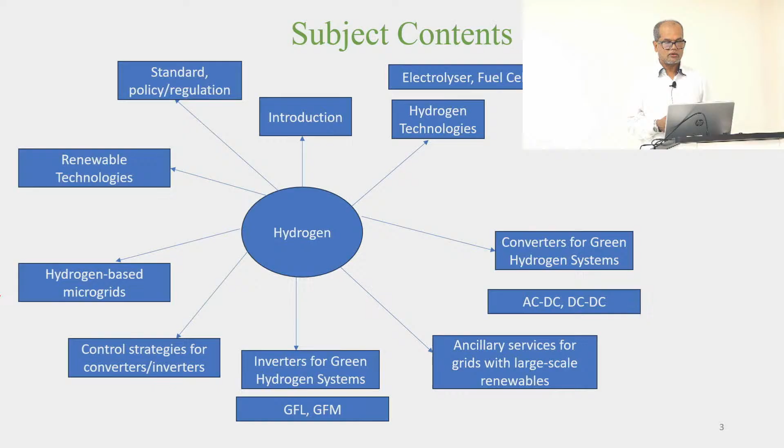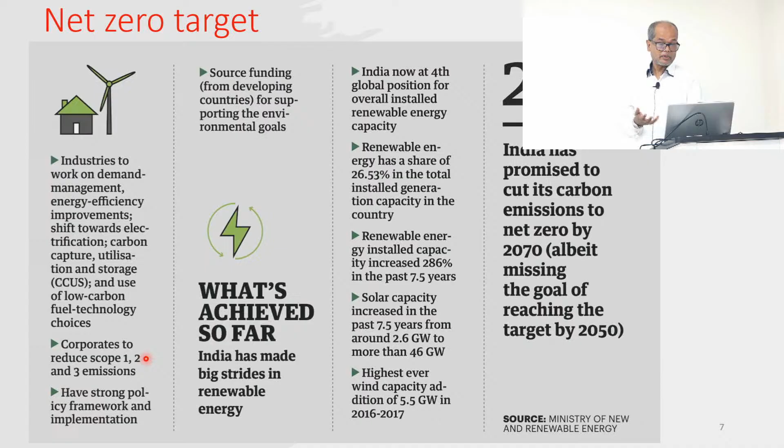Now, although different sectors contribute to greenhouse gas emissions, as you know, the electrical power network is one of the major contributors of carbon dioxide or greenhouse gas emissions. And it's not like we can address all of the challenges only by going for 100% generation from renewables. Due to the energy transition, across the different sectors in the power system, including generation, transmission, distribution and even behind the meter, there are many things happening.

For example, if you think about generation, as you know, most existing centralized fossil fuel generators are being replaced with renewable sources. The transmission sector, although comparatively more intelligent than distribution, is also seeing several changes. For example, in recent years you will see many phasor measurement units for wide area monitoring as well as control. In Australia, we do have a number of phasor measurement units installed in the transmission sector.

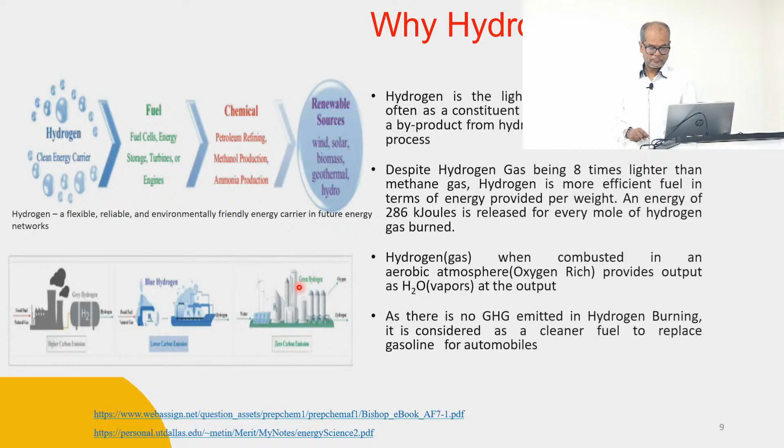This one shows the total value chain of the green hydrogen system. It involves production, and there are many production methods; we're going to touch most of them, like gasification, electrolysis, and steam methane reforming. We won't focus much on carbon capture, but with blue and other hydrogen systems we do use carbon capture, because that type of hydrogen emits carbon. We'll also talk a little about combining gas and electricity networks, and there is research going on into improving the combined network.

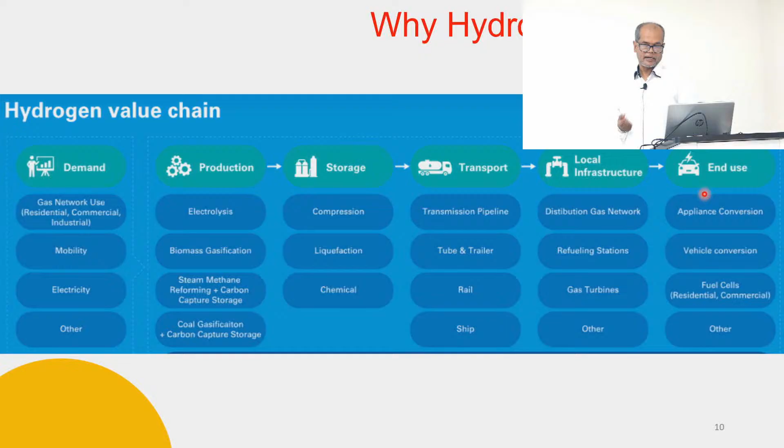So what I'm trying to say is that the gas network, electricity network, and also hydrogen are all interconnected. Now at some stage, we can optimize and improve the performance of individual systems, but to get the better benefit, sometimes we might need a combined model for the whole system, to optimize and also benefit from the coupled system.

Although it's not always that you have to consider the combined model. For certain applications, you can just consider either a device or part of the whole system. But as I said, if you want the whole value chain, then sometimes you need to develop the model for the interconnected system as well.

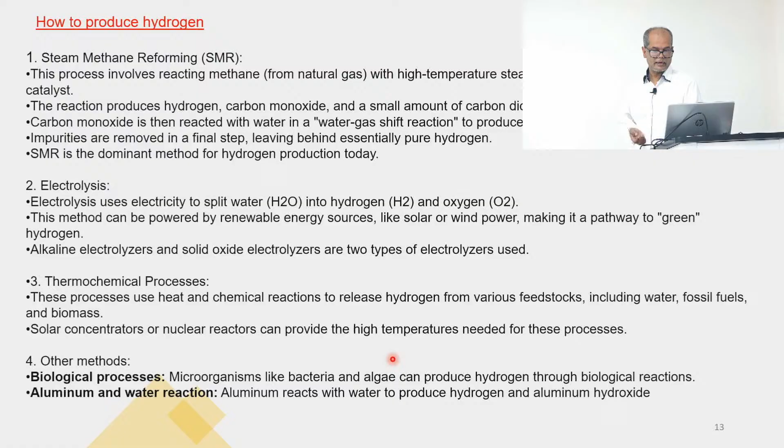You might also know that solar concentrators, even nuclear reactors, can provide the very high temperature needed for the process to produce hydrogen. And there are other biological methods that use bacteria and algae to produce hydrogen from biological reactions as well.

So there are different pathways, but in this course we're going to focus more on electricity using the electrolysis process. Although it might be difficult to read, it's giving some comparison of different methods. The most important parameters could be the efficiency we get from different methods, and also cost, considering the base cost, the current one being steam methane reforming. So compared to this one, how is the cost for other methods, and which technologies are already matured and which are still going through more research and development to improve efficiency, safety, and so on.

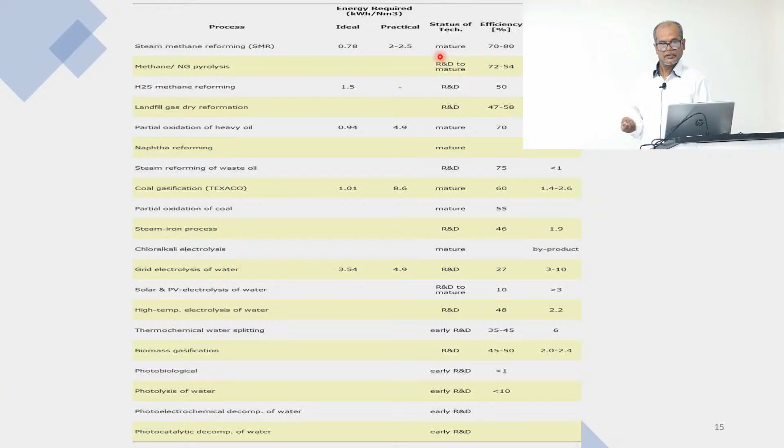So now I'm going to go quickly into more details about the different methods we can use for hydrogen production. Steam reformation, I already mentioned, is one of the most matured and commercially established processes. Different industries are already using it to produce ammonia, to refine petroleum, and in some cases for hydrogen energy systems as well. Among the existing commercially available methods, it's one of the cheapest.

And we're going to talk about how there are mainly three components: anode, cathode, and electrolyte. There are chemical reactions happening at both anode and cathode, and here you can see that from methane gas using water, it produces hydrogen, but it also produces some carbon monoxide. Using that carbon monoxide again with water can help produce more hydrogen. But you can see it still emits some carbon dioxide, and that's why we need carbon capture if we want to make this hydrogen cleaner.

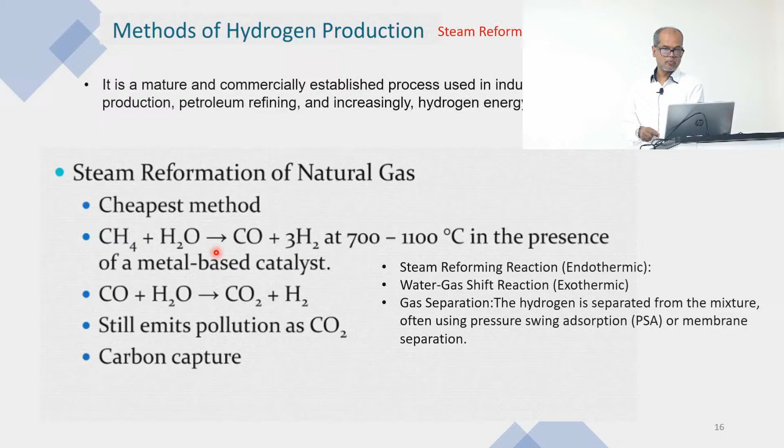It has some advantages. As I mentioned, it's more matured, relatively low production cost, comparatively higher efficiency, but it has limitations in terms of carbon dioxide emission. It relies on fossil fuel, mainly natural gas, and it needs higher energy input, because the process is highly endothermic. There are a number of applications: ammonia, petroleum refining, methanol production. It can be used for fuel cells if coupled with carbon capture and storage, and it can be used as blue hydrogen when integrated with carbon capture and storage technology.

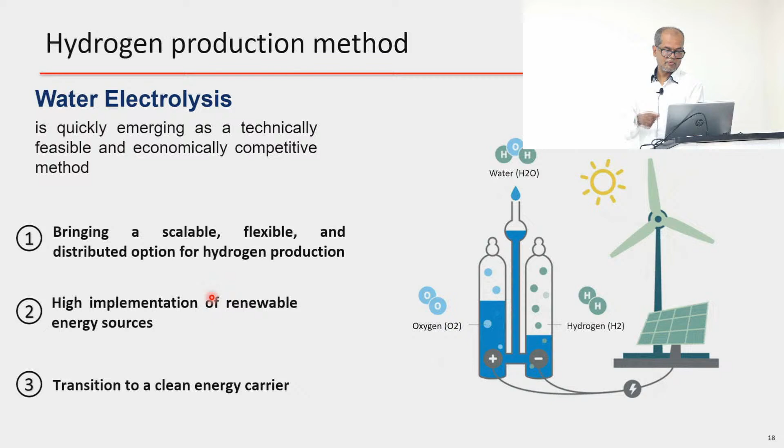And this is, as I said, our most optimal and desired process in coming years to produce hydrogen from different renewable energy sources. The energy might come from solar and wind, and using the electrolysis process we can produce hydrogen, but it also produces some oxygen as a byproduct. This one is more scalable, flexible, and could be distributed for hydrogen production in any area you want. And as we've talked many times, it uses energy from renewable sources.

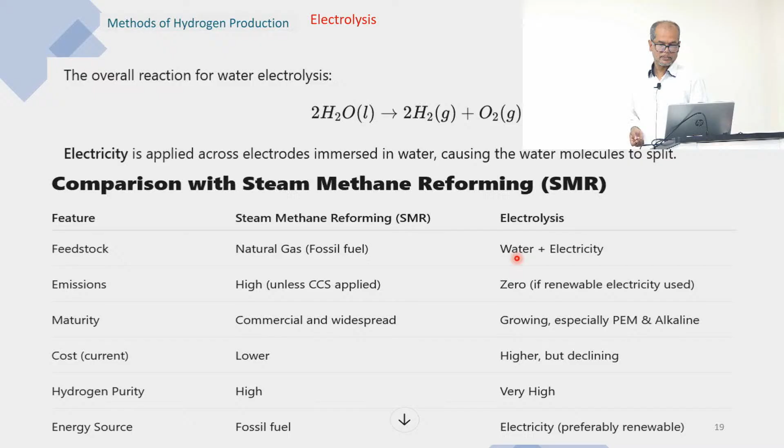So if you compare electrolysis and steam methane reforming, cost is one of the factors: steam methane reforming is relatively cheaper than electrolysis and more matured, but it definitely has higher emissions, while for electrolysis it's almost zero when the input energy comes from renewable sources. Electrolysis uses mainly water and electricity, and the other uses fossil fuel like natural gas. We already talked about the advantages, so I'm not going to repeat that.

Still, if you think about the cost of producing hydrogen by electrolysis, in Australia it's still like $5 to $8 per kg, but to make it comparable with other gases it has to be around $2. So there are many research projects going on into how we can reduce the price by reducing the cost of hydrogen technology, reducing the price of input electricity, and improving the energy efficiency of the whole system. And so far production is only at a very micro scale, so macro-level production will also help reduce the price.

Hopefully that might happen in the next 5 to 10 years, and if it happens, green technology is going to be used for different industries like ammonia, methanol, steel, cement, even for transportation applications, energy storage, and more importantly, it's going to be connected at large scale with the grid to provide support, to reduce peak demand, to improve power quality, and to provide ancillary services like controlling voltage, frequency, and so on.

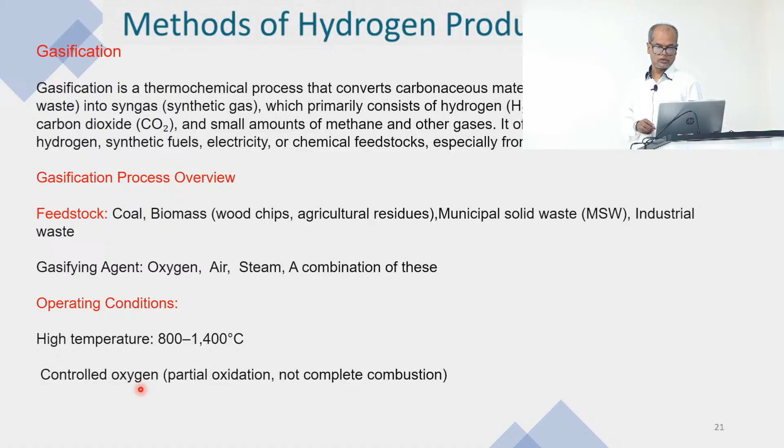Again, this one also has different types of applications: to produce hydrogen, synthetic fuels, ammonia, methanol, and waste-to-energy production. And it does actually convert low-value and waste material into usable energy. So that's one of the important advantages of this method. It has higher efficiency compared with direct combustion, but it does have a number of limitations as well, because it involves capital-intensive technology.

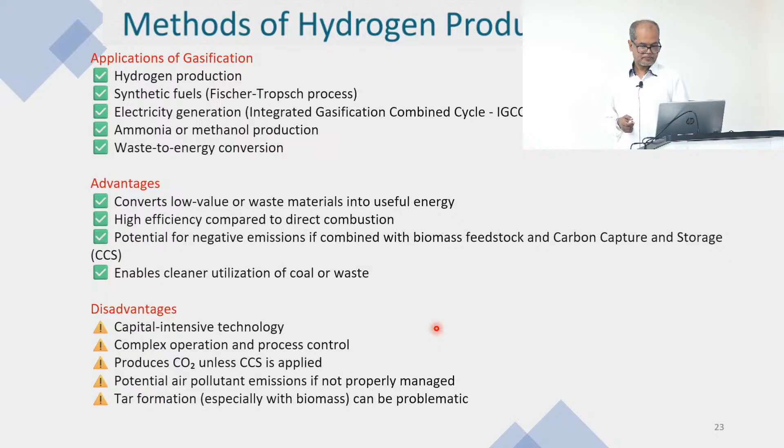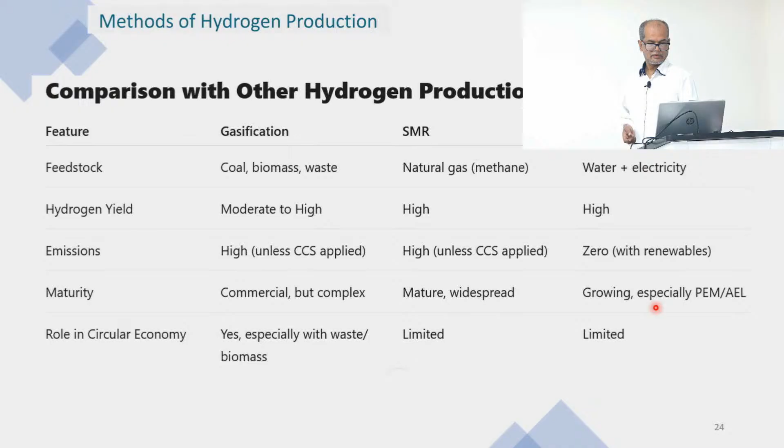It produces carbon dioxide unless we use carbon capture and storage technology. In terms of the overall process, it is the most complex, and we need to have good control of the overall process. And this is giving again a comparison among the 3 methods, but I think we already talked about most of this. In this case both are quite mature and commercially available, although this one is commercially available but still growing. So maybe we still need further improvement of the fuel cells as well as the electrolyzer technology that's currently available.

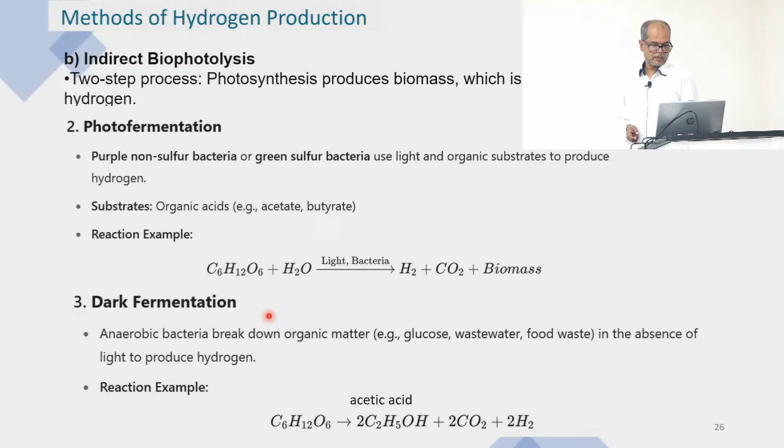So there are some indirect biological methods as well that have two steps, that can produce hydrogen from biomass using photosynthetic methods. So you can see that from glucose and water, using light and bacteria, it can actually produce hydrogen, although it does have some carbon as well. And also dark fermentation, that's another method that could be utilized to produce hydrogen from glucose as well.

We already talked many times about what green hydrogen is, what the different applications are, and why we call it green. You already know about that as well. We already talked about how it has an anode, cathode, and the electrolyte membrane, and the input energy coming from renewable energy sources. From water and input energy, it produces oxygen and hydrogen ions, and these hydrogen ions pass through the membrane to the cathode, and then using those hydrogen ions, it produces the final hydrogen.

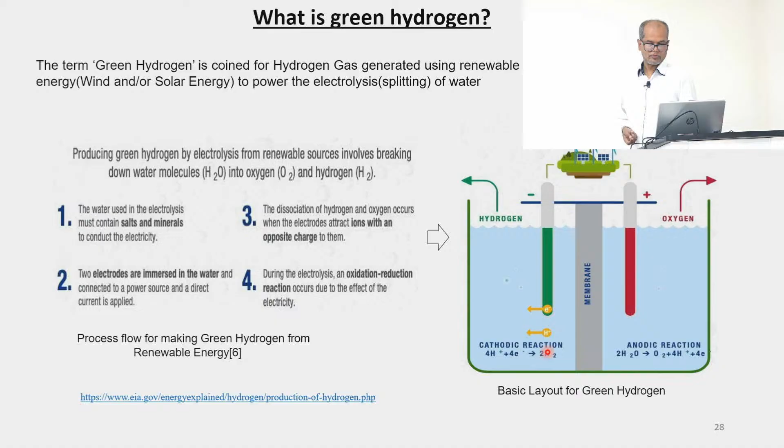I'll also skip this slide because you already have it, you can just read it later. We also already talked about the impact of different green hydrogen technologies on different sectors. For example, in the environment, it helps to reduce greenhouse gas emissions. It can improve air quality, and it can also provide a solution to a number of the problems introduced by large-scale renewable energy integration. For example, in Sydney and in different states, during off-peak time, in the morning and afternoon, we have additional renewable energy generation.

And in many cases, for example, if you have rooftop PV and you are producing energy, and you supply energy to the grid during off-peak time, instead of the grid providing money, they actually charge you, because they already have enough generation compared to the load demand, and when we supply additional energy to the grid, it creates more problems for the grid: power quality, voltage and frequency issues. So that's why they actually have a negative tariff.

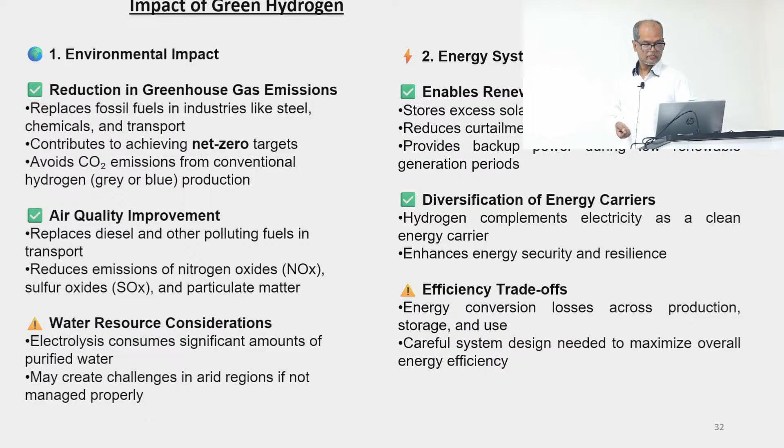Now, in Australia we already have a number of projects, some of them ongoing, but some of them are already producing green hydrogen as well.

One of the biggest projects happening now is in Queensland, in Brisbane, where the government is spending almost $15 billion. They have a big suburb with a number of different industries, commercial and residential areas, and the whole area is going to supply heating, cooling, industry, and different transportation applications.

We're gonna use hydrogen from that particular area. Not only that, we also have a number of renewable energy hubs and renewable energy zones where we have the option of including hydrogen. And in New South Wales, the government is now targeting a number of offshore areas - there are 5 areas already targeted, and work has already been done to have 5 hydrogen hubs, where they are also installing offshore wind.

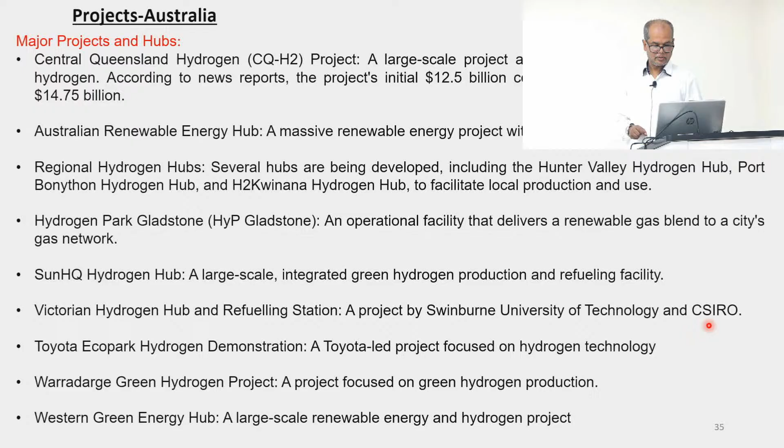In terms of transportation application, in Australia we already have 12 hydrogen refueling stations, out of which almost 6 are already operational, because in Australia we do have a number of hydrogen-powered small cars, but that number is not that high. But in terms of heavy vehicles like buses and trucks, there are actually a number of them in different states already running, and they can easily get hydrogen fuel from those fuel stations.

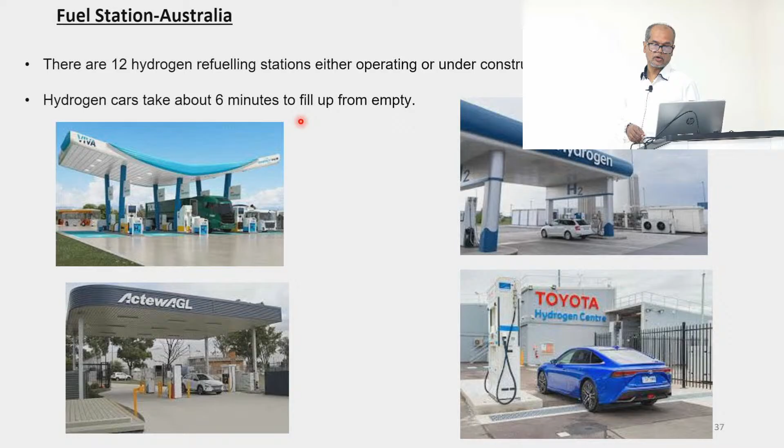As you know, if those vehicles use battery, mainly for heavy vehicles, they need a very long time to recharge the battery. Another option is to have a number of batteries, which makes the overall system bulky as well. So for those reasons, for heavy vehicles, hydrogen would be the best solution. But having said that, there are still some hydrogen cars available in Australia, and as I said, most states already have hydrogen fuel stations that are operational.

In India also, there are a number of projects ongoing. I know that India and the Australian government have had a number of discussions and talks to work together in this sector, because we also have potential that maybe these countries can export, not just utilize, but also export hydrogen to other countries as well.

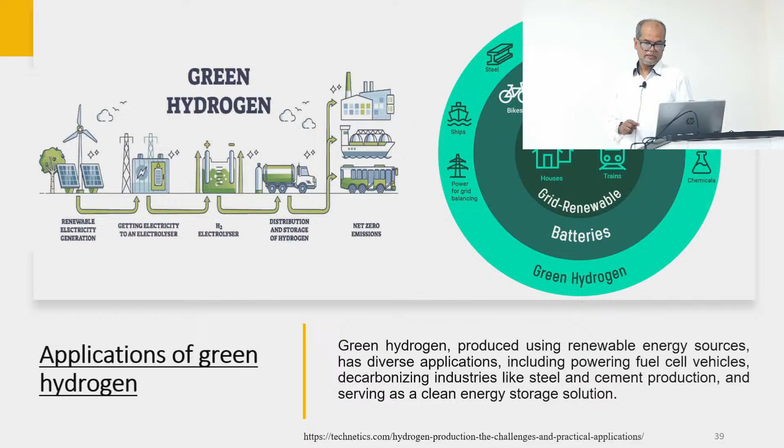I already mentioned different applications - battery already has different applications, but green hydrogen will have even bigger applications in grid, even in ships, steel industry, and even aviation - there are already a number of unmanned aerial vehicles using hydrogen. Also, different fertilizer industries and other chemical industries might be using hydrogen in coming years.

As I already mentioned, fuel cell application in heavy duty vehicles and long haul transportation - this technology is already available. Only the issue is the price.

But as you know, both the battery and hydrogen price are coming down significantly. Every year, the battery price is going down by 15%. So almost in 3 years, the battery price has gone down like 50%. And if that trend continues, I believe in the next 5 years, the price for IC engine based cars and battery vehicle cars would be almost quite similar.

Although hydrogen might take a little bit longer, maybe 5 to 10 years, to bring the price down. But the way that both research and development are going, and most governments are spending heavily in this sector, we are quite hopeful that this time hydrogen is definitely going to be one of the dominant fuels in coming years.

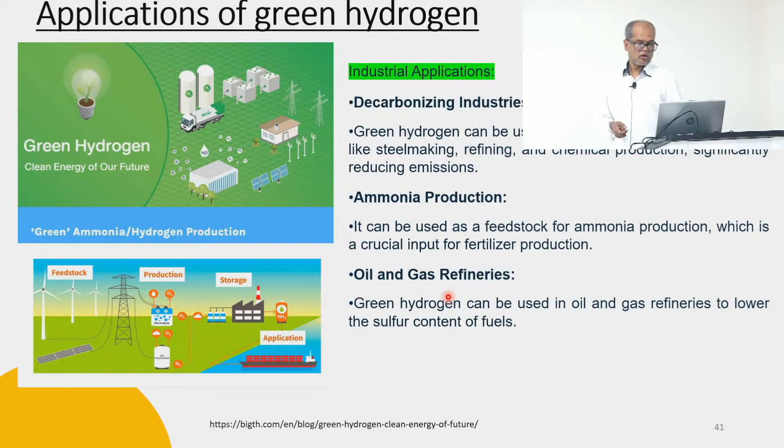So it's not only transportation but also decarbonizing different sectors, because in many cases you will see that some industries might not be directly electrified. So in those cases, to decarbonize, hydrogen could be one good alternative potential. It also can be used, as I mentioned, in the oil and gas refinery sector as well.

In different chemical production, and also steel, cement production, methanol production - in those industries too. In Australia, already one of the steel and cement production companies is using green hydrogen to decarbonize the sector, because in Australia, what happens is in any industry, if they produce carbon dioxide beyond a certain level, there is a penalty.

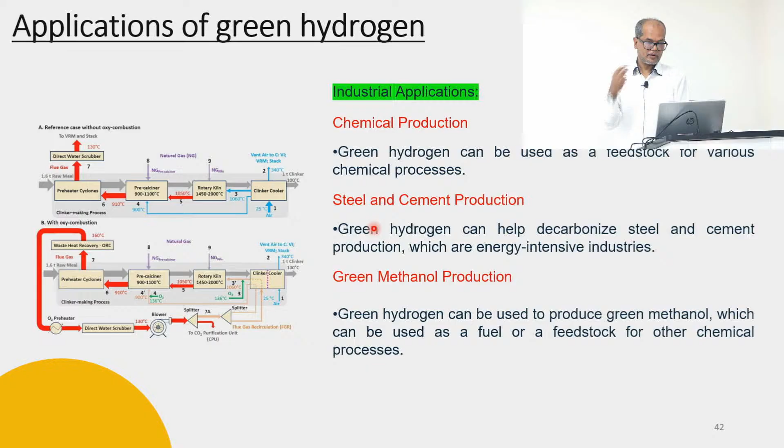So that's why most industries are also trying to have different alternative options to reduce their greenhouse gas emissions, and that's why they have already started to use green and blue hydrogen using CCS, to meet their target. And in the energy sector, as I said...

Still there isn't any large scale integration happening, but if you want to have 80%, 90% renewables, then definitely we have to think beyond only battery, because the battery has got capacity for only maybe a few hours. But if you want to have very longer duration storage, then definitely hydrogen is going to be the better solution.

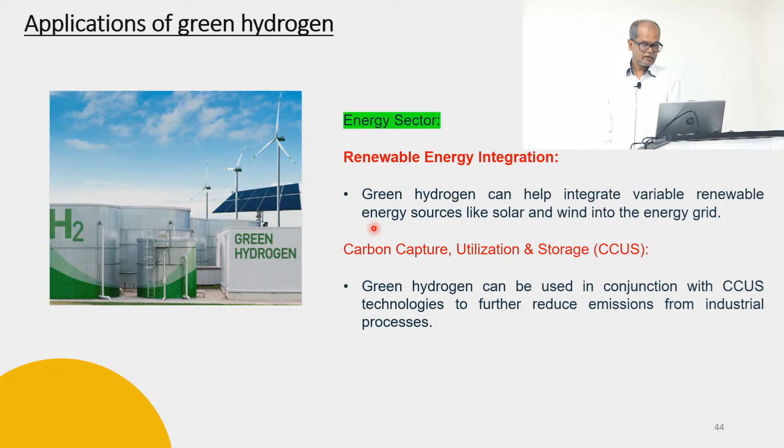So definitely the energy sector is going to use hydrogen to solve many of the problems that we're going to discuss in coming lectures.

In heating, already in some areas in Australia, they are using green hydrogen for heating applications. In food, many food industries are also in the process of thinking about utilizing hydrogen for their food production as well.

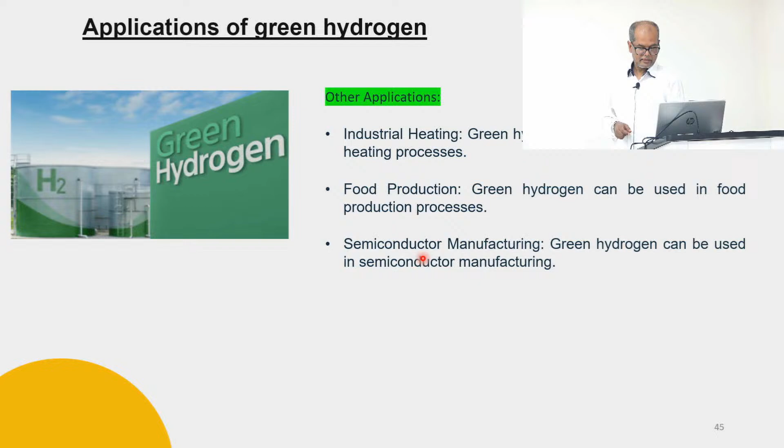Many semiconductor manufacturing industries are also thinking to utilize hydrogen in coming years. And as I mentioned, different countries have got different forecasting about their upcoming hydrogen consumption as well as hydrogen export.

So in Australia, we have got different scenarios considering business as usual, or a step change, or gradual change. But whatever way, definitely the consumption of hydrogen is going to significantly increase in Australia.

But in Australia, actually the main idea is not only national consumption, but also to export hydrogen to countries like Japan, Germany, Korea, and it could be between India and Australia as well. In India also, I found that they have some forecasting that in coming years, the hydrogen market is going to increase significantly.

The way that different industries and government are investing - so it's not only government, the private sector is also coming into this market. So that's going to help significantly increase the hydrogen market as well. And not only India, Australia, but also USA, China, European countries.

The cost, we already mentioned that's high cost - we need more research to reduce the price, and also improve mainly PEM technology, because this has got probably more opportunity to utilize, since it has better performance and is also very fast compared to others. But it also needs more research to improve efficiency, lifetime, and adaptability to work in different environments.

Renewable energy and catalyst, as you saw, is one of the major elements responsible for higher cost. So we need more research to find lower cost catalysts that can also provide better performance. People working in material science can probably contribute in that regard to improve performance.

There are also limitations in terms of infrastructure, because for hydrogen storage and transportation, most existing infrastructure is either unavailable or underdeveloped. In Australia, they're thinking about blending hydrogen into the existing pipelines, but there are still many challenges and it hasn't happened yet - they are still thinking how can they do that. If you want to produce large scale hydrogen, we need a very reliable and cost effective distribution network to supply hydrogen from production to the end user.

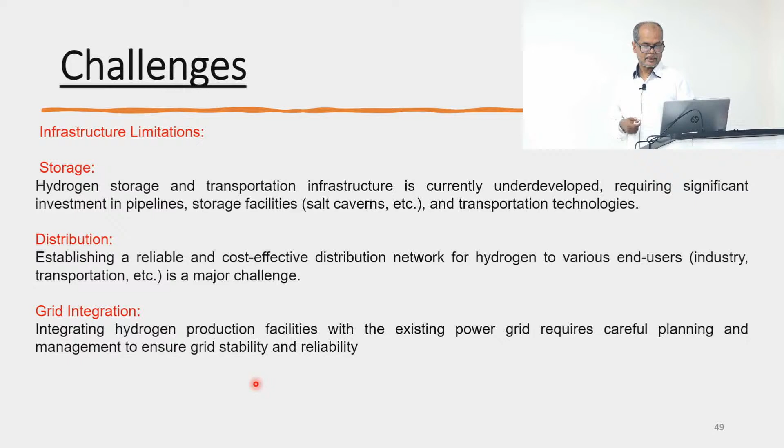Grid integration, I already mentioned that - we need better planning and management to ensure stability and reliability of the overall sector.

But safety is also another reason. Still many people don't want to buy a hydrogen car, because they say if there is an accident and something happens, that might be very dangerous for the driver as well as the passenger. So public reception is still a problem, but we need to work with different people to better explain the technology, its advantages, and the safety level as well.

Because at the end, as an engineer, whatever we do, if it is not accepted by the community, it's never going to happen at the commercial level. So that's why as educators and industry leaders, we need to also work with the community to convey the real message to the industry as well.

And as this is a new area, we also need new standards, mainly to interconnect with the grid, and also for deploying in different industries. So we need to improve them; there are some standards like IEC and IEEE, but we need to work more to improve the standards as well. And also different countries have got different regulations.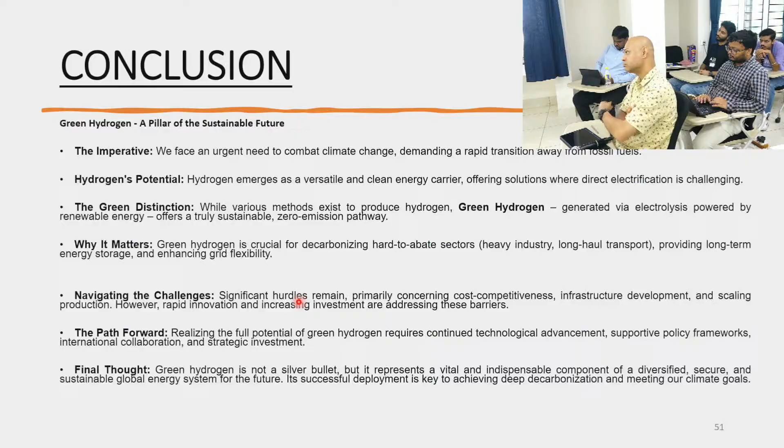So is there some matching that you see, or do you think that there's still some piece that is missing, that something can't be matched to everything else? I think that's a very good question. I mean, in the perspective of Australia, in the previous government, they were not only very biased toward the electrolysis process, so they actually invested a lot to see how they can improve that existing mature technology that we already talked about.

So they tried to see whether gray or blue hydrogen produced using different methods can be utilized with CCS to get their target. And at that time they had a number of projects to see not only using a single technology, but using a mix of all the available technologies, and then finding a unified way to combine them all together and utilize them.

But when the government changed and the current government came, they said they're going to be heavily investing mainly in renewables and the electrolysis process. Now the momentum has shifted a little bit, and they are more biased toward only the electrolysis process. But having said that, in Australia I did not see any combined effort from industry, government, and academia to address the issue that you mentioned and make it reality.

But I think there is still some research and industry work going on in the other pathways as well. So I believe it's still not happening at a unified level, but it might happen at a certain stage, because I think we still believe that we need a mix of solutions, not a single solution that can solve all our problems. Yeah.

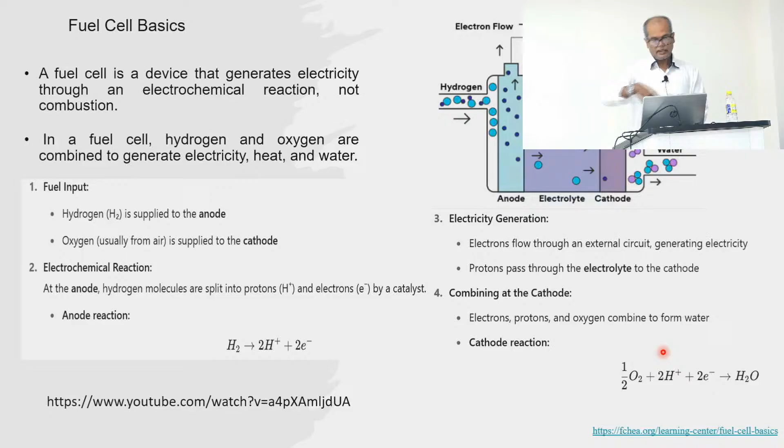Now before going into details about that, fuel cells also have different applications. We already mentioned transport: it could be car, bus, truck, train, ships, aircraft. You might have different stationary applications as well, like a backup power supply system. It could be for a laboratory, a small community, houses, a hospital, a university campus and so on. It is also sometimes used with combined heat and power plants.

It can be used for portable power supply for portable devices, and one of the applications they are seriously thinking about is military equipment. It also has potential for space exploration. You might know that Apollo was already using fuel cells for space applications.

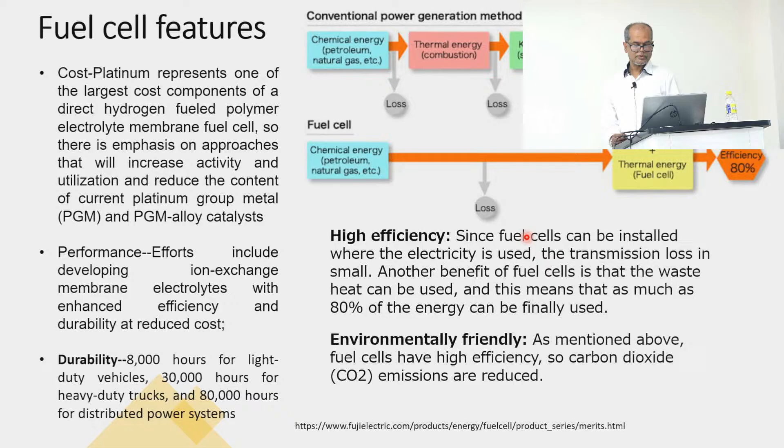And these are some of the expected lifetime durations for fuel cells. We are expecting a minimum of 8,000 hours, 30,000 for heavy duty trucks, and 80,000 for grid applications and distributed power systems. I already mentioned the efficiency, and this is definitely environmentally friendly as well.

There are a number of advantages compared with the combustion process we mentioned, and even compared with its competitor, the battery. It can have longer operating times than a battery. It can operate over wider temperature ranges, whereas battery lifetime is sometimes reduced significantly. It can operate in very cold and very hot weather.

And as already mentioned it's efficient, it's silent and it doesn't have any rotating parts. It needs less maintenance. So these are some of the advantages compared to a combustion engine, or even compared to a battery.

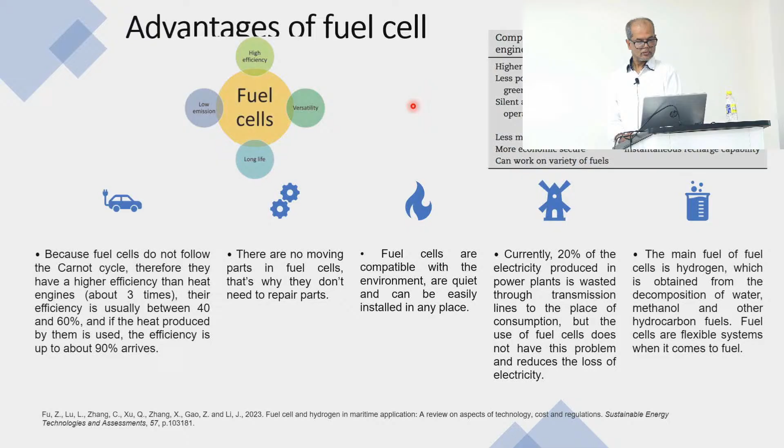But there are still some challenges. This technology needs a constant fuel supply. It's still quite expensive, and it produces DC. As you know, we mostly use AC in our homes, so we need inverter and converter technology with the fuel cell if you want to supply power to an AC load.

And also, in terms of transportation application, it is heavily limited by lack of facilities for hydrogen storage and distribution, as we already mentioned. There are so many technologies now already available in the market as fuel cells, but as I said, most commonly you will find alkaline. We also have phosphoric acid fuel cells, molten carbonate fuel cells, polymer fuel cells, and also solid oxide fuel cells as well.

Now if you see here, all of them have different temperature ranges, but PEM, which uses polymer as the electrolyte, has a very minimum temperature. It's around 80 degrees centigrade. Other than that, the others have comparatively higher operating temperatures. For example, molten carbonate is comparatively very high temperature.

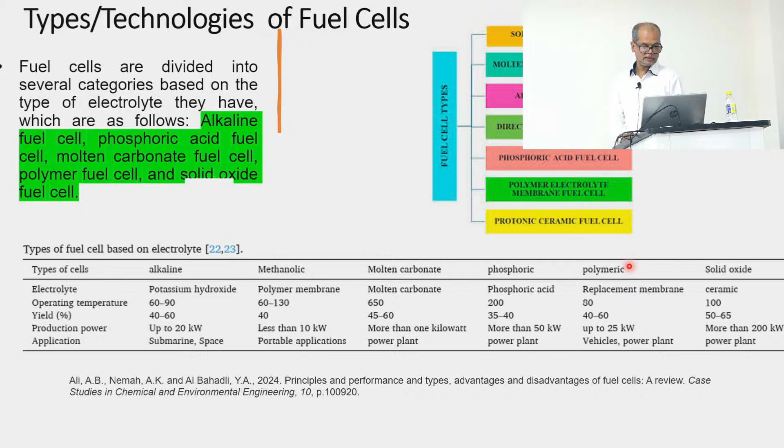In terms of efficiency, this is still without using heat, but as I said, if we use heat, then this efficiency is going to be much higher. And also for power plant and vehicle applications, we need higher capacity, which PEM has. The other one, solid oxide, also has comparatively higher capacity as well. But so far most people are giving more attention to PEM technology.

Now again, I'm not going to repeat the same principle, only the difference here. You can see that it has an anode and cathode, where we have hydrogen and oxygen input. The only difference here is that we use potassium hydroxide as the electrolyte. And what is happening here, initially, is from oxygen and water,

and whatever electrons we are getting, using those we are producing hydroxide ions, and these ions pass to the anode via the electrolyte. Then at the anode side, using those ions and the hydrogen coming as input, we finally produce free electrons, and these free electrons flow through the external circuit, which is nothing but electricity. Overall you will also get water as a byproduct.

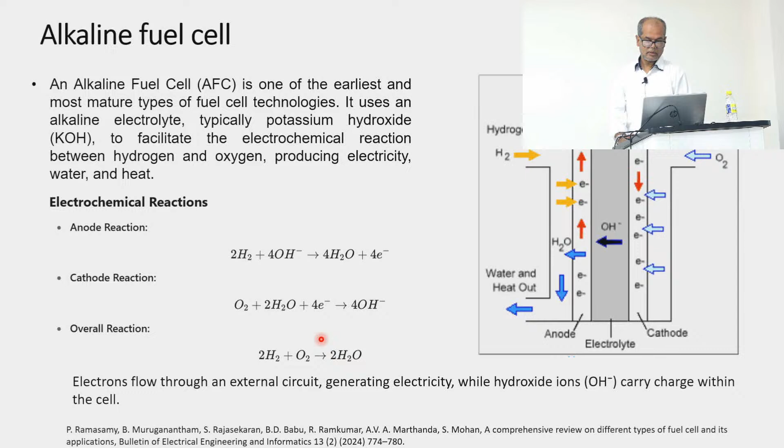Now again, that's the summary of this technology in general. For this one, as we were talking about previously, it needs pure hydrogen as an input. Other things we have already discussed, and it already has some applications. The space program I mentioned, Apollo, used this technology for electrical power supply as well as drinking water for the spacecraft. It also has military applications for portable power in very controlled environments, which is carbon free, and it has applications in some other industries as well.

If you want more details, a comparison in terms of efficiency and disadvantages is given here, so later when you have time you can read it. But again, this has one of the highest electrical efficiencies among fuel cells, converting chemical to electrical energy very efficiently. It can operate with a number of relatively inexpensive catalysts like nickel and silver. If you compare with PEM, which needs a very expensive catalyst, platinum, which is a very expensive material, this has a lower catalyst cost.

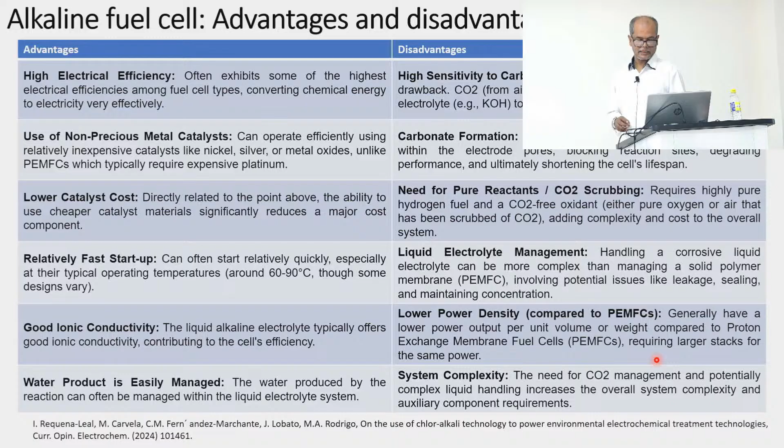And compared to PEMFC, it also has lower power density. It also needs better carbon dioxide management, and the liquid handling process inside the device also increases the overall complexity and the auxiliary system requirement.

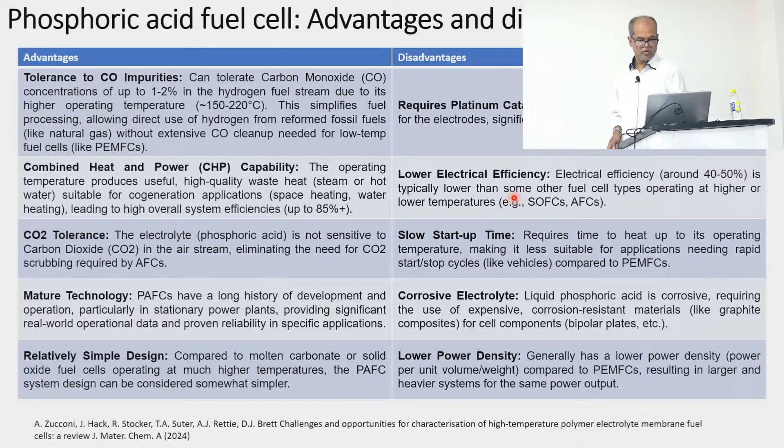So the only difference would be in terms of efficiency and tolerance to carbon impurity. I think this one has better tolerance than the previous one, and combined efficiency is also quite better, a mature technology already available, but the temperature is a little bit higher than the previous one, so that's why it has a slow startup time, and also the efficiency is comparatively lower than PEMFC.

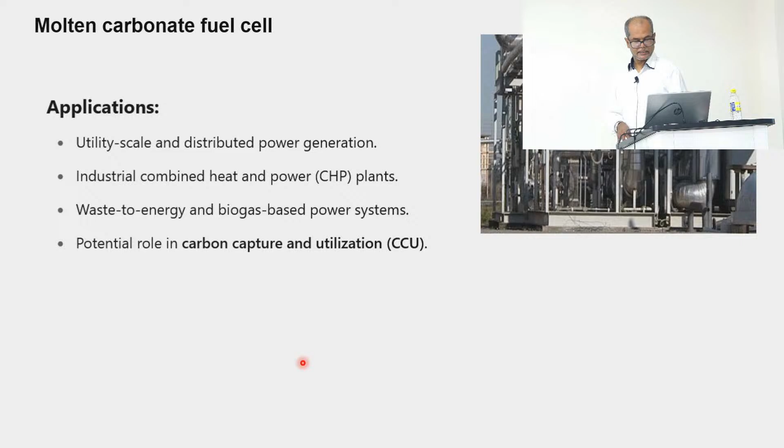So this is the one that I was talking about, proton exchange membrane. Many of you, if you are working in this sector, might be working with this technology. It uses a solid polymer membrane as the electrolyte, which, as I mentioned, is quite an expensive material, and that's the reason it's expensive, but it's actually much faster. So in case of providing ancillary services, as we'll show later, this one provides much better performance than the first generation fuel cell.

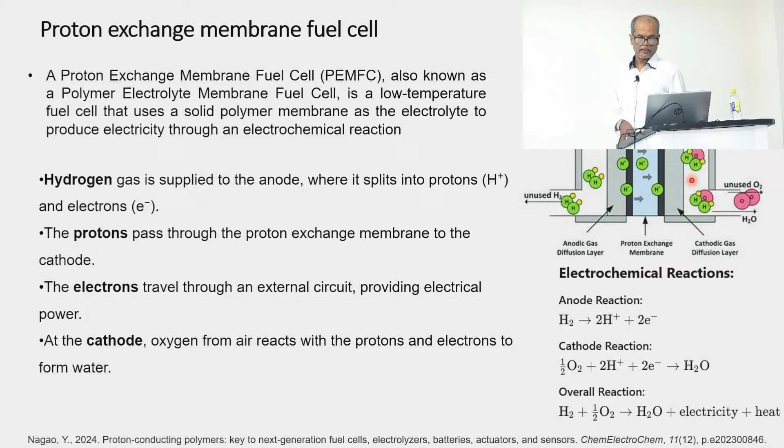So again, the process is all the same. We have the same input, the only difference is the electrolyte. From the hydrogen split, we have a proton and an electron. This proton passes across, producing water, and the free electron is the electricity. It has a comparatively low temperature, 60 to 80 degrees centigrade. It needs pure hydrogen with very strict requirements on carbon impurities, and as I said, it also has many applications.

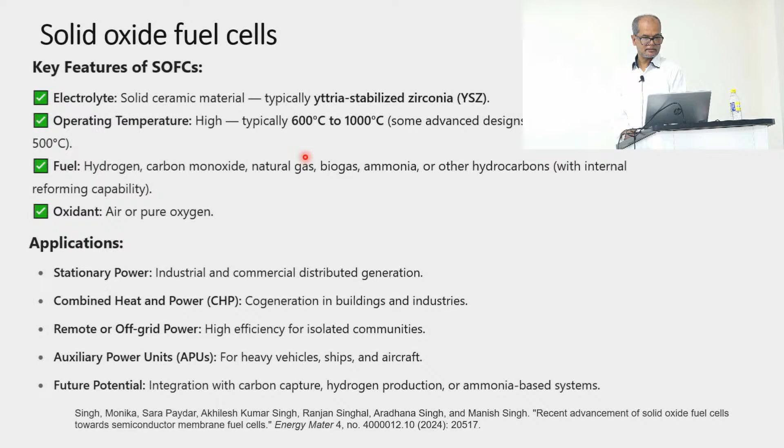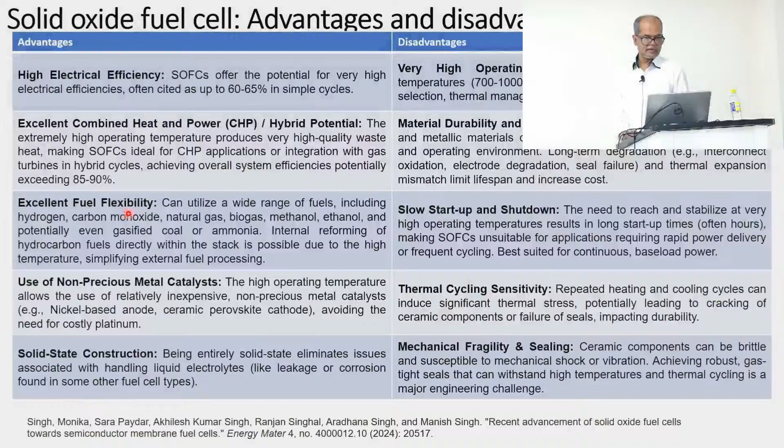So as I said, you see this has a very high temperature, but it can also use different fuels as input, so it's quite flexible on the input side as well. Again, I'll not read this one, because it's just different facts about advantages and disadvantages. It has a very slow start and shutdown time, considering the temperature range, but it also has good efficiency and fuel flexibility, which is quite important when you think about different applications.

Now we just talked about the fuel cell, but what about the whole system? The whole system actually has got a number of subsystems. We already talked about oxygen supply and hydrogen supply in anode and cathode, but that's not the only fuel cell system. You need heat management, because different ones operate at different temperatures, so we need a very good heat management system, and it also involves water, so we need a water management system. We also need power conditioning for better performance and longer life. And not only that, we also need different monitoring, sensors and control to improve the overall performance of the fuel cell system.

Now we just mentioned oxygen input, but that oxygen isn't just directly put in. For oxygen input, we use a system like that, which has got a number of subsystems. For example, we use an air filter to remove any impurity you might have in the input air. Then we also have a compressor, powered by a motor, just to pressurize and deliver air and control flow rate to the fuel cell stack.

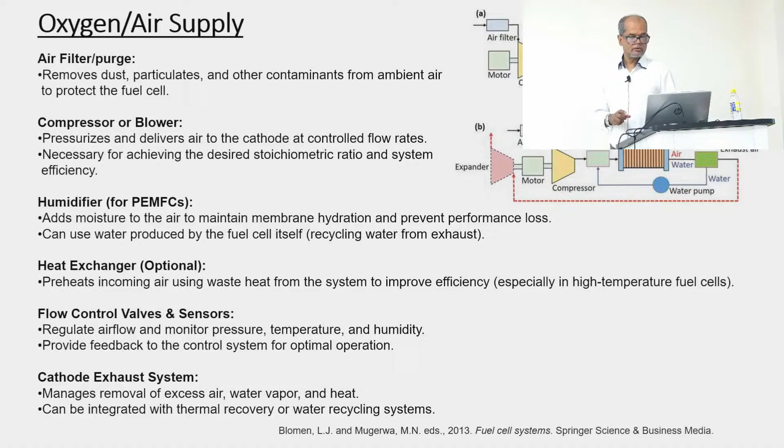So this is the way that we use oxygen input for the overall fuel cell system, and it's the same for the hydrogen supply. We don't directly put hydrogen into the fuel cell. We use a system like that, where you might have hydrogen in the hydrogen tank as storage, either in liquid or gaseous form.

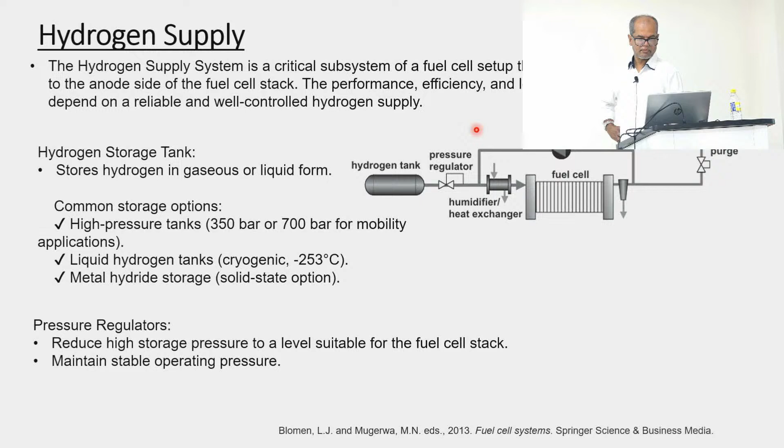Then we have a regulator, which can be used to reduce or increase the pressure to a level suitable for your fuel cell application, depending on what type of fuel cell you're using, and it can maintain stable operating pressure. You see that if you use a high pressure tank, the pressure and liquid might be in a different form, in different temperature, and also the solid. But anyway, you can use a system like this as part of hydrogen supply to the fuel cell.

It also has some other devices like monitoring, control, and sometimes we also use a hydrogen recirculation pump. Some of the unused hydrogen, you might use a feedback loop to put it back and use it to improve the overall efficiency. We also have shut off valves and safety devices, for the protection of the whole system during unwanted situations.

And since it does involve water and heat, we need a water and heat management system, either to improve the performance, durability and safety of the fuel cell system. Once you have that management system, it's going to have temperature regulation and water balance, which might be critical for different types of fuel cell. One critical type needs a very specified temperature and water balance to operate, and the other type also needs a water and heat management system.

So you see that we have a heat exchanger, water tank, water pump. For all of this to operate, we need that particular management system. This one is showing the heat, and the previous one was showing the water. Now these are the main components for the water and heat management system, and you see that all of them have a particular function. For example, the coolant pump, temperature sensor, water separator, radiator, coolant loop, dehumidifier, humidifier - all of them have a particular function in the water and heat management system.

Later, when we're going to talk in more detail about the modeling, in some applications you see that we model all of them. In some cases, for certain applications, we neglect some of the modeling.

You need to have a good idea about the total fuel cell system, like what are the different components, what are their functions, and then how we can develop that management system for the overall system.

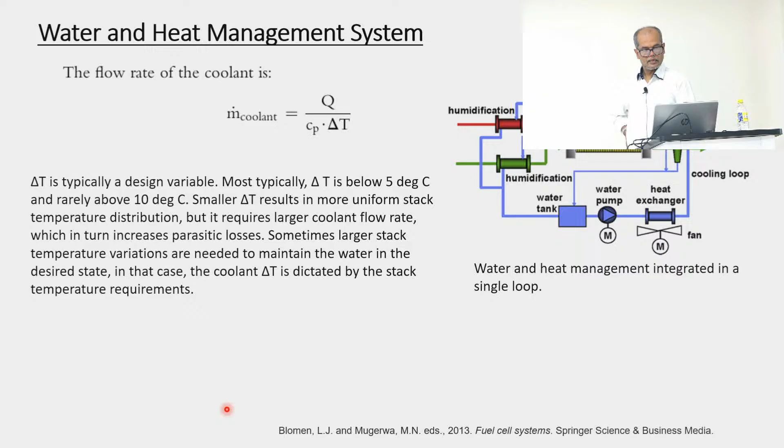Later I'm going to talk about more of the total modeling, but these are like simple flow rates for the coolant, normally water, used for that water and heat management system. I'm not going to talk about more detail about the mathematics now, because I'll talk about that later. This is more about the water system, water balance, the water in and water out for the whole system, and using that balance we can develop differential algebraic equations if you want to do modeling and simulation for different purposes, which I'll talk about in the next lecture.

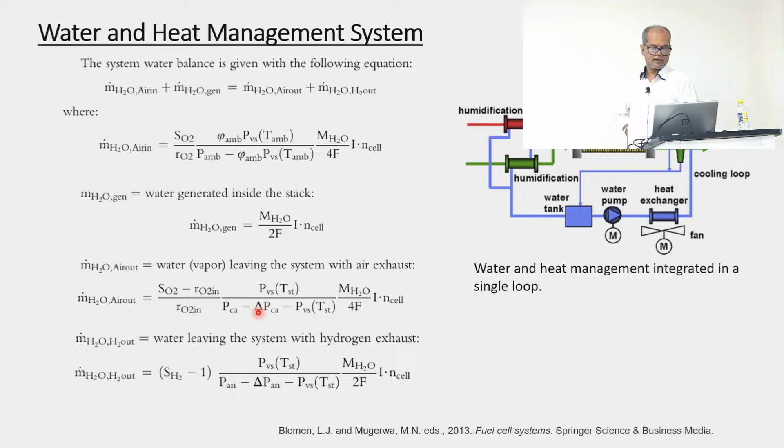As I mentioned, water balance actually depends on the oxygen flow rate, the operating temperature, different pressures, stack outlet pressure, ambient temperature, pressure, relative humidity — all of these come into the picture if you want a very detailed physical model of the whole fuel cell system.

It's not only that — even if you want to integrate with the grid and supply power for a particular application, we need an inverter and converter. We'll also talk about DC to DC and DC to AC inverters later, but all of them have different functionality. It's not only converting from DC to DC, but that's one function. It can step up or step down, but we also apply MPPT, for solar systems and even for fuel cells. We need that control to make sure that whatever the operating condition changes, we are getting maximum power, and that control is implemented in this DC to DC converter.

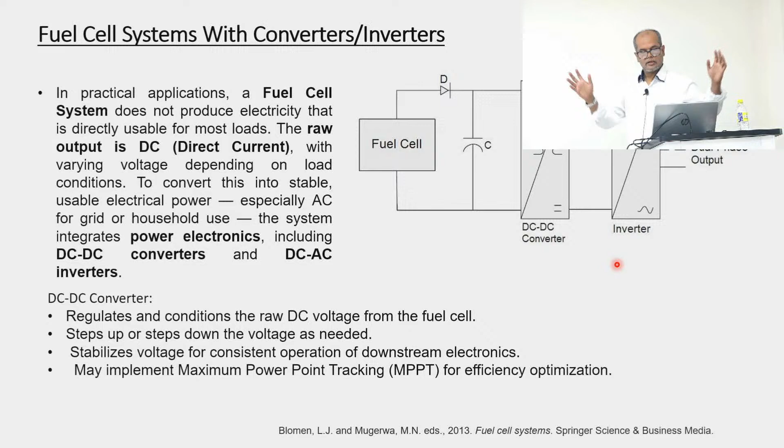It does involve a number of devices when we talk about the whole fuel cell system for modeling analysis. In many cases we need to model all of them, in some cases we can use some and neglect others. So here you see a number of them, like converters we can use, but we're also going to have one session on different buck, boost, and other types of converters for stepping down, stepping up, regulating DC voltage and so on. All of them have certain typical uses as well.

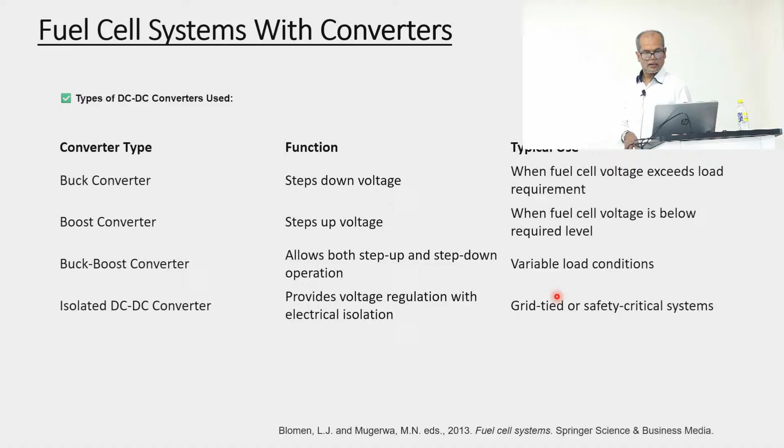For the inverter also we have different types, considering the stage — you might have single or two stage, depending on the grid connection. You can have either a voltage source or current source. Also in recent years, the multi-level inverter has gotten quite popular. It could be a multi-level converter with different topologies, like neutral point clamped (NPC), cascaded H-bridge, flying capacitor, and so on.

This DC-AC inverter converts from regulated DC to AC, but it also has other functions. If you want to get connected, you have to synchronize with the frequency — it's going to be either 50 Hz or 60 Hz depending on the country. If it is Australia or India, I believe it's 50 Hz, but if you go to Japan or USA, it's 60 Hz. Also, whatever the voltage level is, that has to be synchronized as well. And it also involves protection, like over-voltage protection in many cases, islanding detection, and so on.

So as an inverter, it's not only inverting from DC to AC — it involves a number of other controls and protections, and depending on your research and project, at the end you're going to be using whatever model and simulation you need.

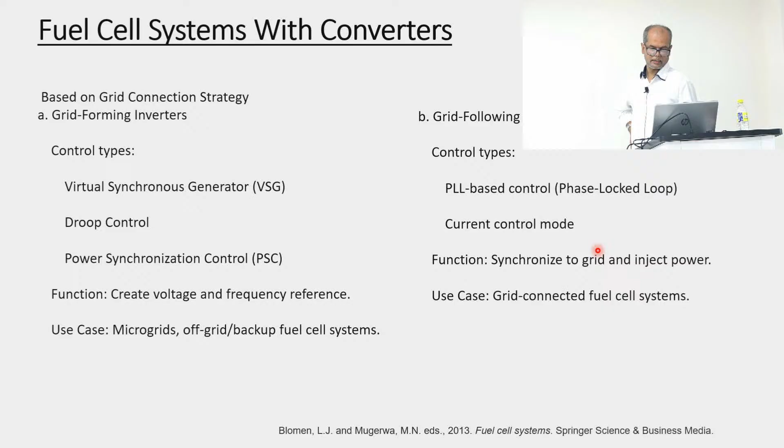The use cases could be microgrid, off-grid, backup fuel cell. But for this one, either PLL based current control loop, and as I said, the function mainly is to inject power into the grid, and also just synchronize with the current grid, and it's mainly used for grid connected systems.

Sometimes you also have some special configuration, like sometimes it could be a bidirectional inverter, and this application is also getting quite common, mainly if you use storage. So you need to charge and discharge the battery, even for fuel cell storage, producing hydrogen, and from hydrogen back to electricity. So we need the bidirectional system, and that also can ensure regenerative operation as well.

Also the other technology we are working on in power electronics is the MMC, modular multi-level converter, because it's quite efficient, and as it is modular, it is scalable as well. When you have got large scale stationary fuel cell, this might be the better solution for that particular application.

So anyway, what type of technology we're gonna use? Again, as I said, it depends heavily on the application and their characteristics as well. Now that's more about the technology, but the fuel cell has got particular characteristics, and one of the characteristics that whoever is working in fuel cells heavily utilizes is the polarization curve.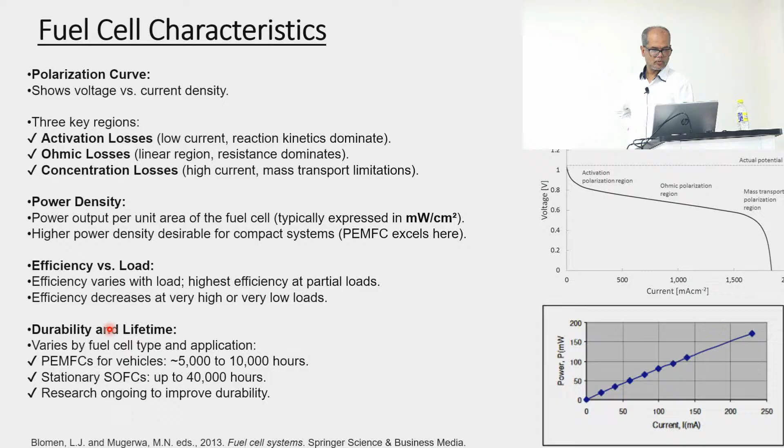Then you could also have other characteristics in terms of power density, how much power you are getting per unit area, because we need higher power density, mostly that will make the overall system compact, and this is one of them that has got quite potential to have higher density. Also we need to check when the load changes, how the efficiency changes, how is the efficiency at low load, how is the efficiency at very high load, and definitely the lifetime and durability is also quite important, and we need to find the characteristics for different fuel cell technologies as well.

So I already mentioned, but here if you want to learn more details about those regions it's given. As I say, this is the over voltage required to overcome the activation energy of the electrochemical reaction, because to start the chemical reaction we need some voltage, and that is considered as losses in the overall system, and the over voltage is not very high, it's 0.1 to 0.2 volt, and then later due to that resistance, we have got that polarization part.

The cell components that contribute to electric resistance are the electrolyte, the catalyst layer, the gas diffusion layer, bipolar plates, interface contacts, and even the terminal connections. All of them actually contribute to that internal resistance. And then there is mass transport, like water, so for that also there are some losses, which is modeled here, but in many applications we neglect that part as well, because that is not actually quite significant.

Fuel cell efficiency, again like all other technology, if you measure output and input, you can find efficiency. Normal range is like 40 to 60%, but if you combine CHP, it's going to be more than 80%. And some of the factors that affect that efficiency are different fuel cell technologies, like alkaline or proton exchange membrane, operating conditions, pressures, and flow rates that can influence efficiency.

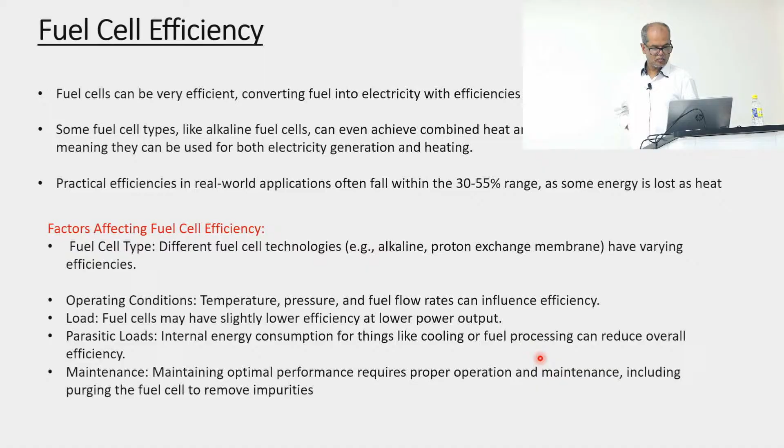The loads: a fuel cell may have slightly lower efficiency when you have got lower output. If you operate at rated capacity, you might get high efficiency. And also maintenance and internal energy consumption due to parasitic loads might affect the efficiency as well. So if you have got proper maintenance, that might ensure proper operation, and that also can improve efficiency. So you already know that.

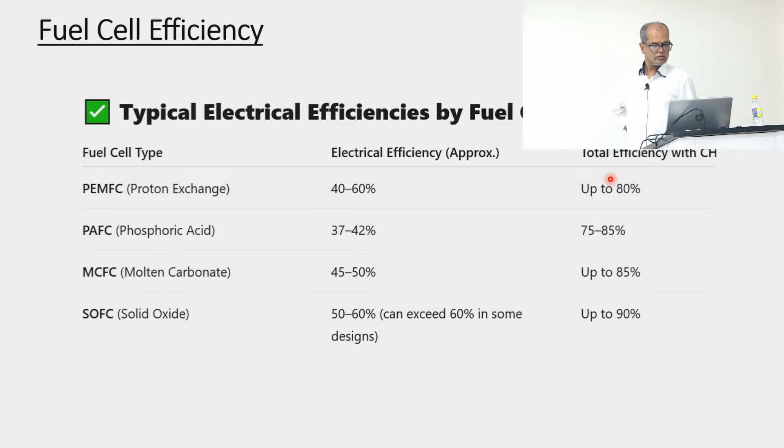So if you want only electrical efficiency, then you take power output over chemical energy input. But if you want it with the heat, then you also need to add heat as an energy output as well. That one is showing efficiency for different fuel cell technologies. If you see PEM, that's quite good. Others also have good efficiency, but in other cases they have got other limitations.

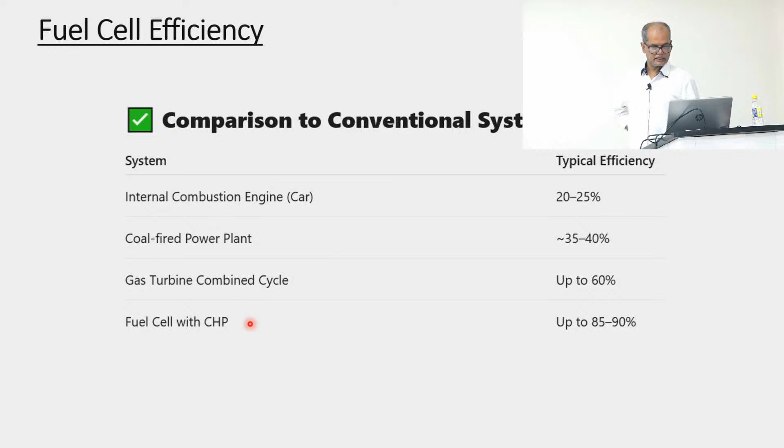So again, just to conclude, the future definitely is green hydrogen, and fuel cells are a core technology if you want to generate power from hydrogen. We need further research and development work to improve the efficiency. I mentioned some of the different limitations for different fuel cell technologies, so we need further work to address those. And definitely it's going to play a significant role in decarbonizing the transportation sector, industry, and power generation.

So I think that's all about your basic understanding of different fuel cell technologies, but how we can model it and also analyze it with grid integration, I'm going to be talking about in the next lecture.

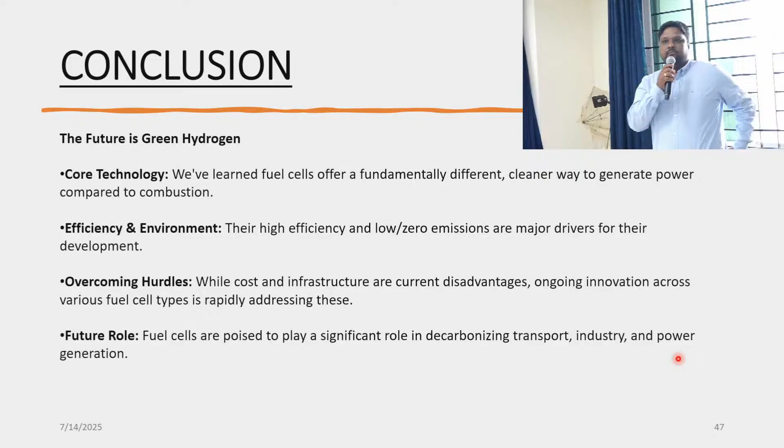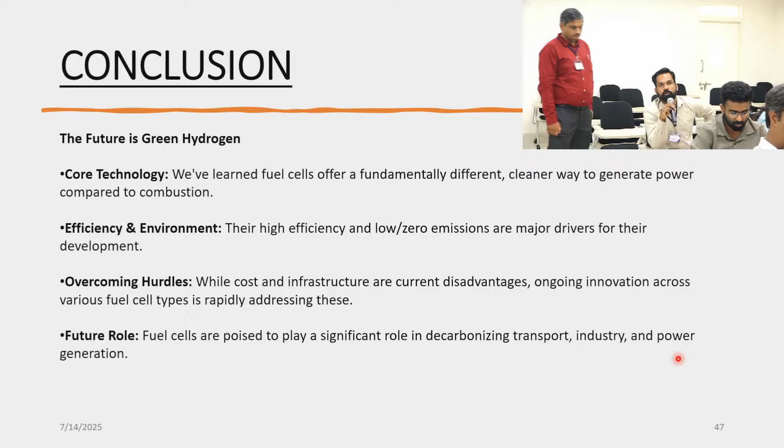Good afternoon, sir. Is it possible for this fuel cell to provide the dynamic response, that is, the transient response? Okay, yeah, that's a good question. It's not a fuel cell, but there are also some generators already available that can use hydrogen and produce electricity. If we use hydrogen, that definitely can provide inertia and other ancillary services to the grid.

But even with the inverter technology that I mentioned, if we use grid forming technology either for a fuel cell or even for an electrolyzer, because an electrolyzer is just a load, right? But even if you control that as a load, you can actually solve a number of problems in the grid. But this is more like a generator.

Even with that, if you use grid forming technology, later we're going to show some case studies and examples. In Australia I know there are already a number of real projects connecting with the grid to see how grid forming technology from batteries, and some are planning from hydrogen as well, can solve that problem. So to answer your question, yes, that's possible, but grid forming is a relatively new technology, right?

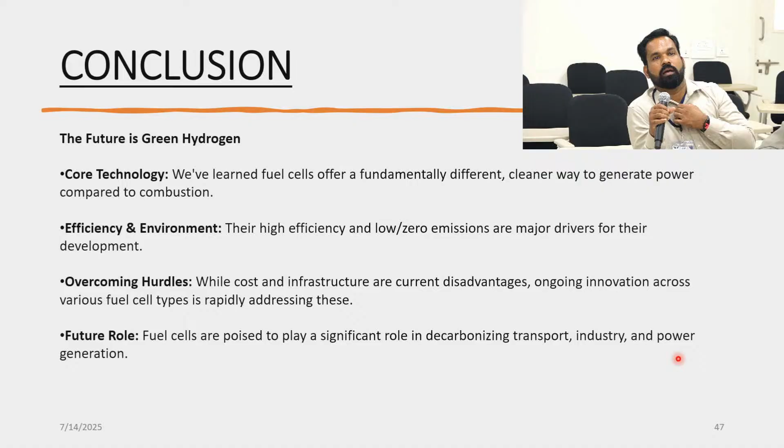So metal hydride, in Australia we already have commercially available metal hydride ones, but they're quite small. You can put it in your garage and things like that. But there is still a problem that the efficiency is very, very low. So they need to improve that efficiency.

Also in terms of cost: you buy electricity from your grid operator, or you are getting electricity from your solar, right? So if you want to get power from fuel cell, the cost has to be comparable. Otherwise, why are you going to pay more money just to buy that technology and put it in your home, while you have the option to get electrical energy from other sources? So to answer your question, yes, the technology is available, but in terms of cost, it's not feasible.

Yeah, with compressed hydrogen, safe operation will be possible, no? Yeah, that's possible, but in terms of cost, still it's not feasible if you compare with other options. Okay, thank you.

Sir, in one of your slides I observed there is an MPPT for efficiency optimization. So to optimize the efficiency, which parameters do we have to consider? So the MPPT is to ensure maximum power. Just consider your rooftop photovoltaic system. During different parts of the day, you have different intensity of input light, right? When that condition changes, you have voltage and current, and if you multiply voltage and current, you get the power.

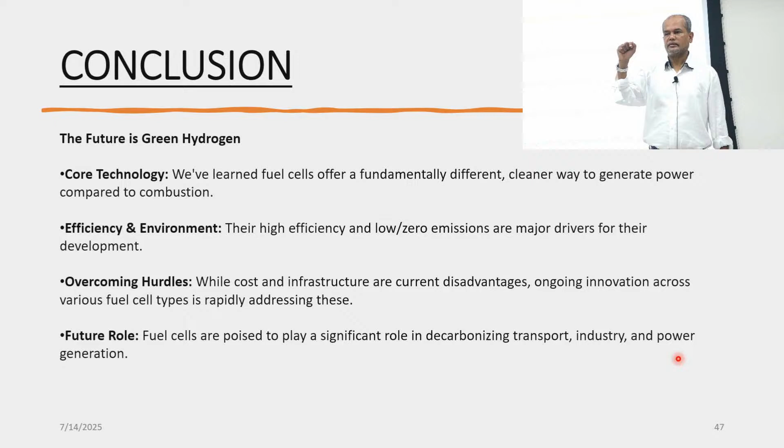Let's say you are operating at a particular point at a certain condition. But when the condition changes, if you continue to operate at that particular point, you might not be getting maximum output power. So what MPPT does, considering all the factors, it continuously changes the operation of the converter to ensure that for any condition you are getting, not maximum efficiency, but maximum output power.

So sir, to extract the maximum power from the fuel cell, we need to focus on the control strategy of the converter side, like the duty cycle and similar things. Yes. Okay, thank you. We're going to talk about the control and DC-DC converter later. That time maybe it'll be more clear how you're going to do it. But you're right, mostly it's the control part, nothing about the power circuit. Power circuit, okay. Thank you, sir.